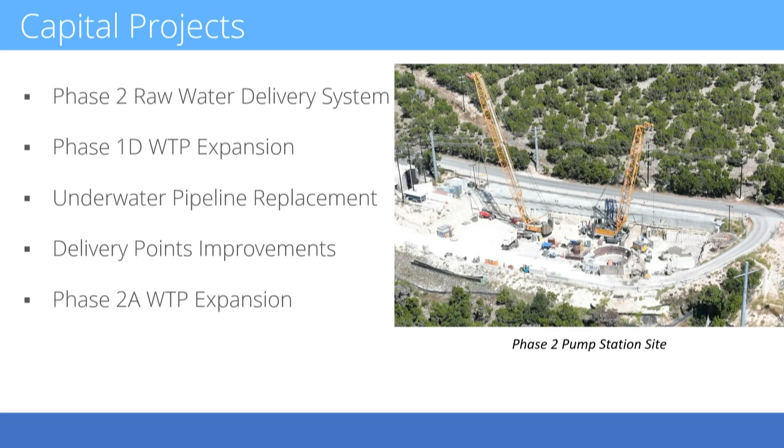Glad to be here with you guys today. I'm Jason Bible with Walker Partners. We'll be providing updates on the Phase 2 raw water delivery system, the Phase 1D water treatment plant expansion, the underwater pipeline replacement, delivery points Phase 1 and 2, and then Phase 2A water treatment plant expansion design.

As far as the schedule goes, they are a little behind schedule, and to the extent that they've fallen behind schedule for 2 schedule reports in a row for greater than 30 days, they have to prepare what's called a recovery schedule. It's not uncommon to be done in a construction contract of this size. They're working on that schedule, we've had good reports from them on that, and it's due October 31st. So I wanted to let y'all know that.

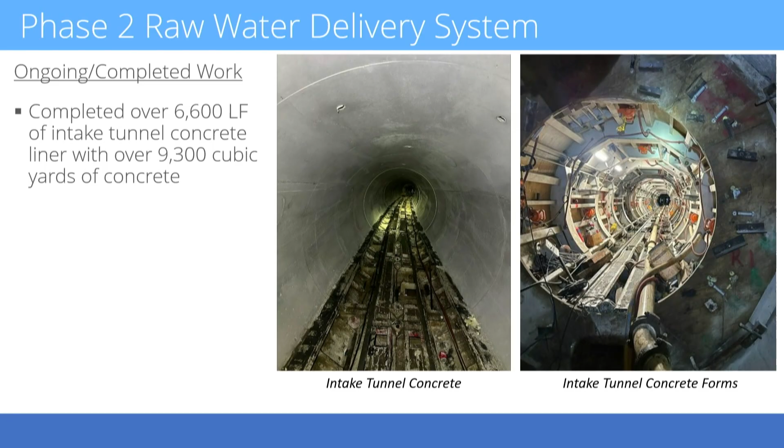The pictures here, you can see the finished concrete tunnel liner on the picture on the left, and then on the right, you can see the tunnel forms that they use to form that concrete.

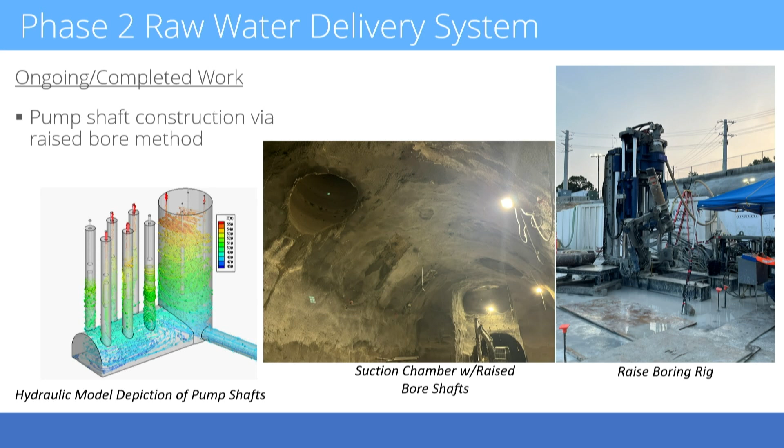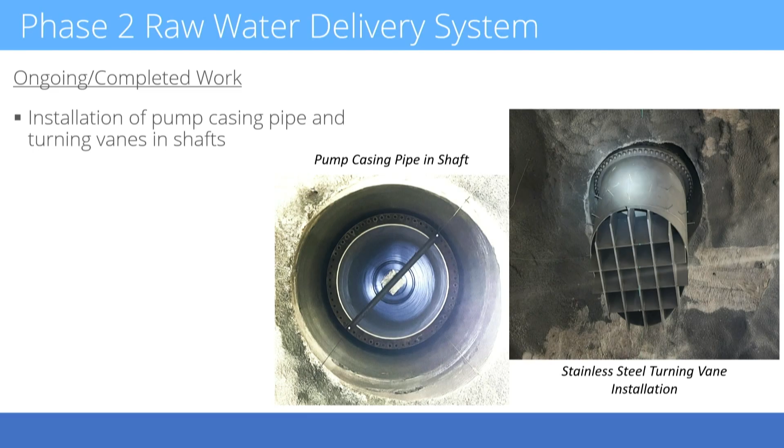So upcoming work, we'll complete the intake tunnel concrete liner, complete the raised bores. Currently they've done 2 of the raised bores and installed the casing. They still have 4 more pump casings and then the discharge shaft to do as well. Then they'll complete the tie-in at Trails End.

They'll complete that tie-in at Trails End. They'll place the suction chamber concrete liner, and once they get that concrete liner done, they can move up top and start the pump station work.

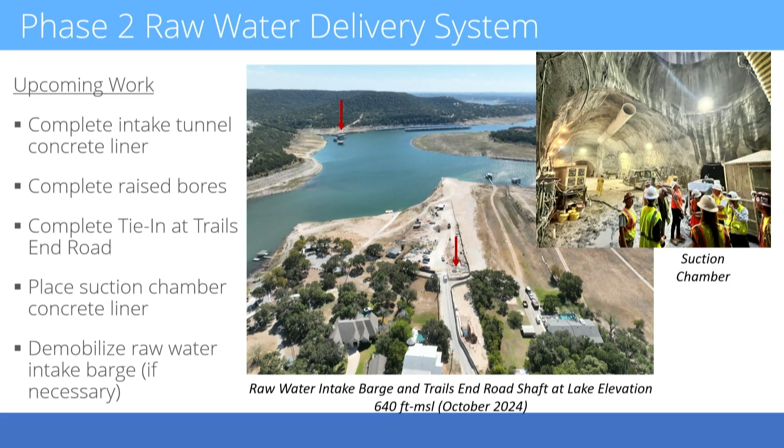On the Phase 1D water plant expansion, that notice to proceed was in May of 2023. They're about 85% done on the construction schedule. They're about 3 months behind right now. We think that we'll begin startup and commissioning here in February and complete that project in the spring.

Contract status, that's a $16.8 million project. We've had 1 change order for $190,000, 0 days, and they've invoiced about 47% of that contract. They're doing a really good job, they kind of got a late start, but they're really making some good headway.

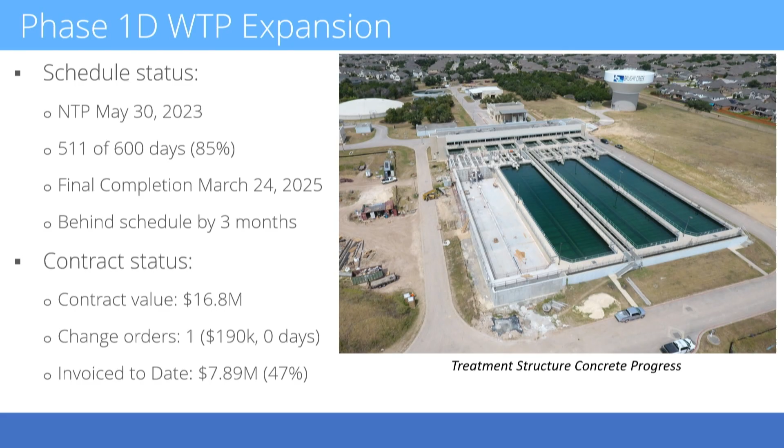Upcoming work, they'll complete the basin, all the installation of all the equipment, the thickener, and then these raw water head tanks.

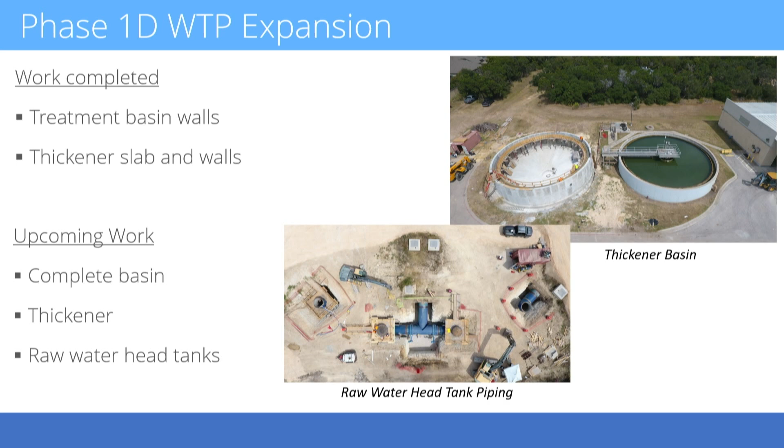On the underwater pipeline replacement, that project's really been done for several months now. They did achieve substantial completion on time. That was a $6.7 million contract.

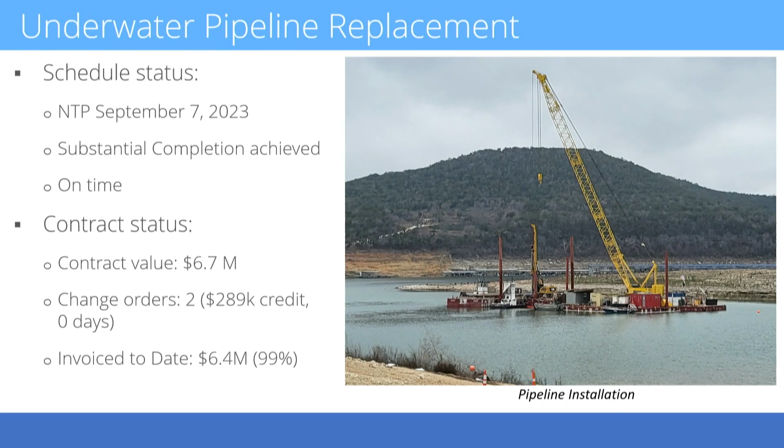We had 2 change orders for a $289,000 credit. We've invoiced pretty much everything. We're holding back some retainage. There was an issue with an actuator that they installed on a raw water valve that they've got to go in and repair sometime in the November, December time range. So we're holding back that retainage until they make that repair.

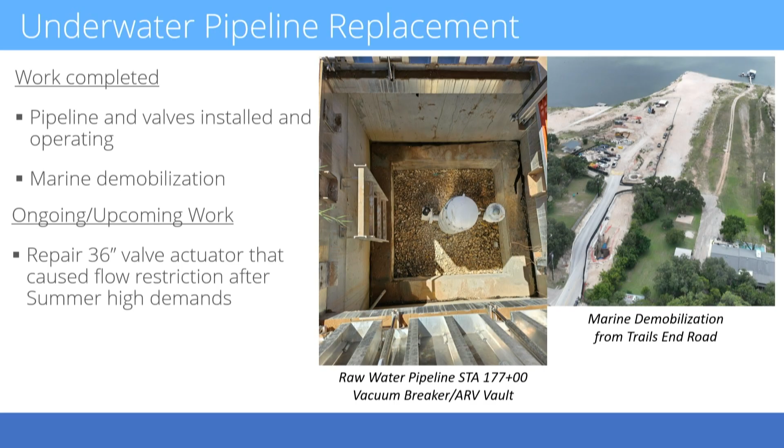Delivery points, we've got 2 phases. Phase 1 was issued NTP back in November 2023. They are very late at this point. There's been some issues with them originally getting going, and then some communication issues we've been trying to work out. We estimate they're going to complete that project in December now. It's really not that big of an issue, but it's something we're tracking. That contract had a value of $448,000.

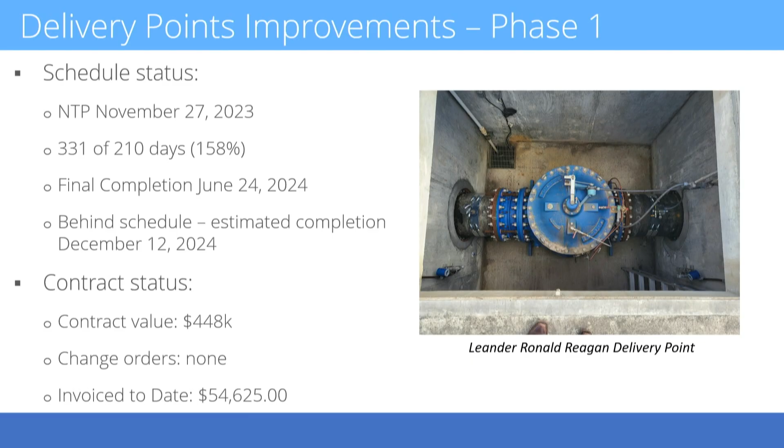There's no change orders at this point, and they've only invoiced $54,000, but they've done a lot more work than what they've invoiced for. The picture to the right is a piece of the work along Ronald Reagan that they're currently working on. I didn't get an updated picture, but they're actually working on it right now, so it won't look that much different, but just a little bit different.

On the Phase 2 project, that's a lot of electrical and instrumentation controls, improvements to several of the Leander delivery points. That project was issued notice to proceed this summer. We expect substantial completion in April, and then final completion in May. That was a contract value of about $612,000. There's no invoices, no change orders at this point. But they are proceeding in a much more timely manner on this project than they were in the Phase 1 project.

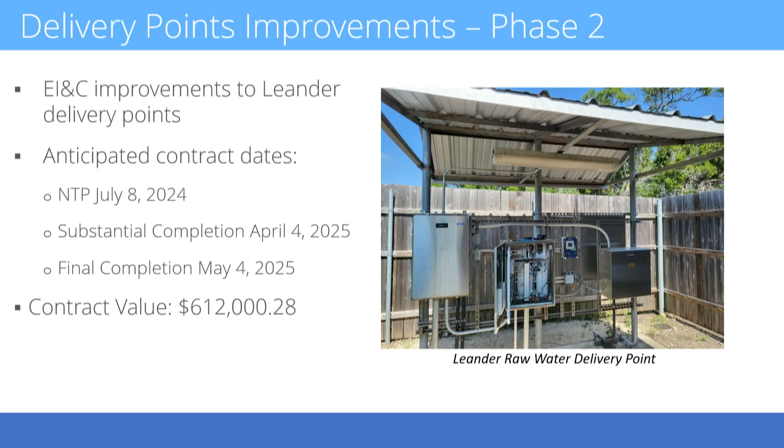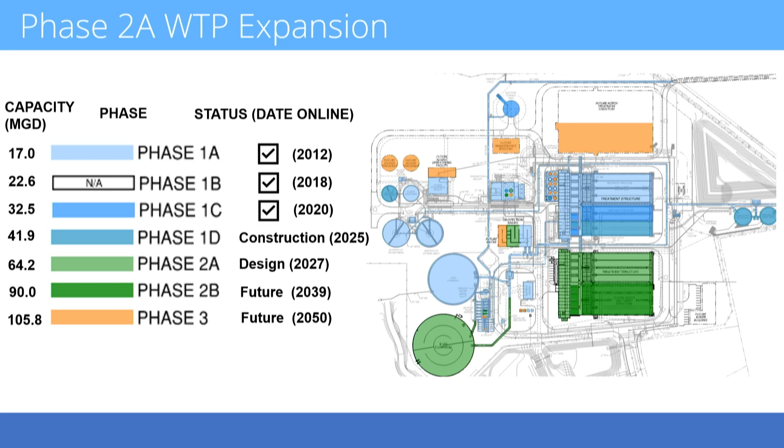On the Phase 2 water treatment plant expansion, we've just wrapped up 60% design on that project. That's into BCRUA for review. We're proceeding on with 90% currently. Just to refresh everybody's memory, that's mainly being split between Leander and Round Rock, about almost 50-50, but that'll raise the overall treatment plant capacity to just over 64 million gallons per day.

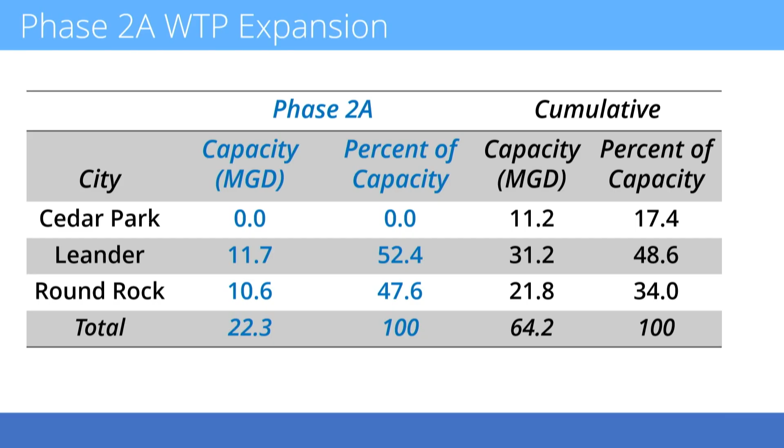We expect to move into final design and permitting in March, or complete design in May. We'll move into permitting in March, and we expect bid and award sometime this summer. Then we'll move into construction and expect substantial completion in May 2027, about the same time that Phase 2 will wrap up.

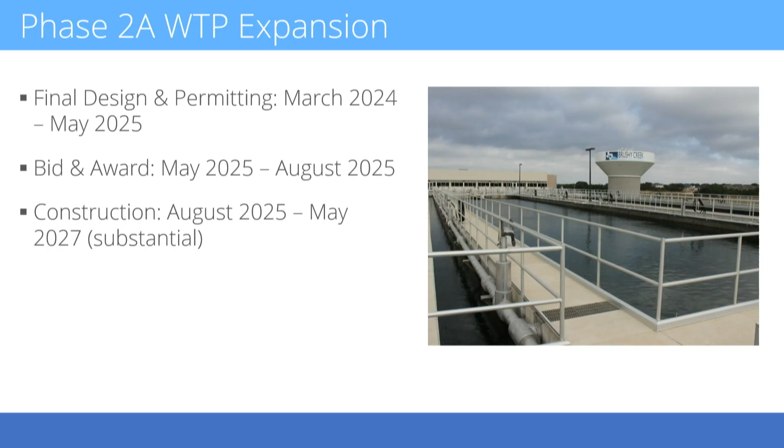If y'all have any questions, let me know. Thank you for the update. Any questions or comments? All right, thank you.

Item 6A, consider a resolution by the Board of Directors of the Brushy Creek Regional Utility Authority, Inc., authorizing the issuance of Brushy Creek Regional Utility Authority, Inc., City of Round Rock, Texas contract revenue bonds, Brushy Creek Regional Water Treatment and Distribution Project, Series 2024, establishing the procedures for selling and delivering the bonds, and resolving other matters incident and related to issuance, payment, security, sale, and delivery of such bonds.

This item, as the agenda wording describes, is one of 2 items on the agenda tonight for almost the final activity for the takedown, 2 takedowns, one from Round Rock and one from Leander for SWIFT money. The first up tonight is Round Rock's, and Gary Kimball from Specialized Public Finance is going to be making that presentation, possibly with Richard Donahue. I think Richard will probably come up if there are any legal questions.

I'm going to cover basically what the item entails tonight, which is essentially approving the resolution which would allow us to deliver bonds to the Texas Water Development Board, to the SWIFT program, on behalf of, in this case, item 6A, the City of Round Rock, $31.5 million.